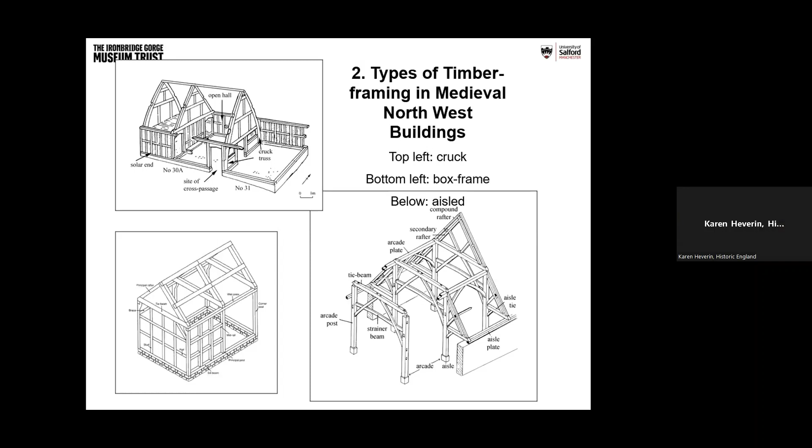The cruck frame building is one of the three main types of timber frame building that we have in northern England. Box frame building is the most common. The least common is the aisled building, and the cruck frame buildings are somewhere in between. In terms of numbers, there's probably 3 or 4 times the number of box frame buildings than there are known cruck frame buildings in northwest England, and that's pretty common for the area, as we'll see in a moment, where you find box frame and cruck frame buildings overlapping.

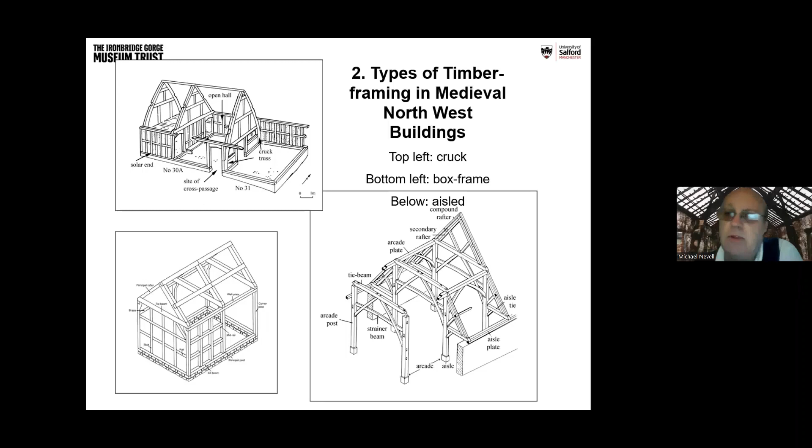One of the features of the cruck frame building is because you've got this capital A-shaped truss, it allows you to have a very big space on one floor, and so quite often you see these buildings associated with an open hall in the centre of a building. And more typically they're 3 units long. So they're very much in that later medieval tradition of open hall, communal living, and they fit that kind of development in the 12th to the 15th centuries.

These are the major elements you'll find in a cruck frame building, and so you can see the individual elements of the truss on the right hand side, where we have the 2 curved trusses, and then a collar and tie beam. Quite often you have a yoke at the top as well.

So you end up with those 3 forms of braces, and then you get spurs to the outer walls. And what that means is that the outer walls are really quite structurally separate to these A-frame trusses, and it's the A-frame trusses that support the roof. And whilst that gives you a large volume of space in each of these rooms, it does also make it actually quite difficult, quite inflexible to add extra stories.

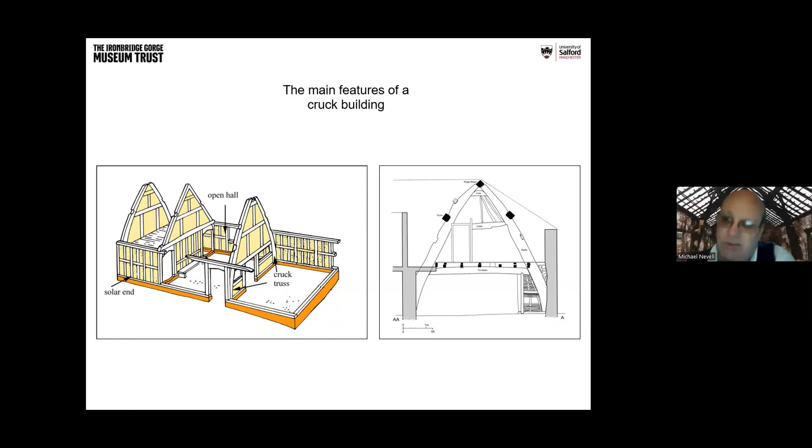We will see examples of buildings in a bit where the cruck frame truss structure has been adapted, and the way they've added extra stories is by moving over to a box frame tradition. So whilst this building form is great for the big spaces and communal living, it's not so good when we move into the 16th and 17th centuries, when there's that shift towards more personal living, more specialised room space, and the need for extra rooms and more stories. And that's really where cruck frame buildings start to fall out of fashion.

The Vernacular Architecture Group, I should give a shout out for them, because they've been pulling together the data on cruck frame buildings across Britain since the 1960s. Nat Alcock in particular has been leading that research for at least 40 years. They have a fantastic online database of cruck frame buildings, which they took the opportunity of the pandemic and lockdown to update and turn that into a live database.

And that database does 2 things. Firstly, it's got individual entries for all the cruck structures that we know of in Britain. Secondly, it also records the tree-ring dated, dendrodated structures across Britain as well.

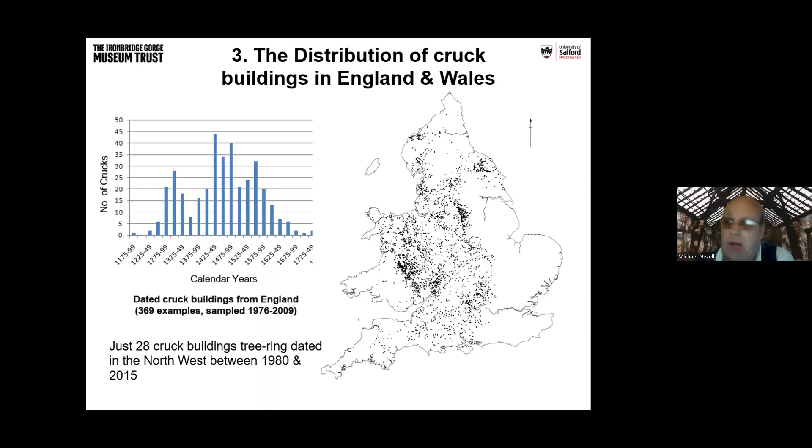Now, researching cruck frame buildings in the northwest of England goes way back to the 1970s. The first study of cruck frame buildings in a serious manner was undertaken by Marion McClintock in the Fylde Peninsula, which is the area behind Blackpool in that sort of northwestern corner of Lancashire. And here 35 cruck frame buildings were identified in the 70s and early 80s. Many of them were surveyed as well.

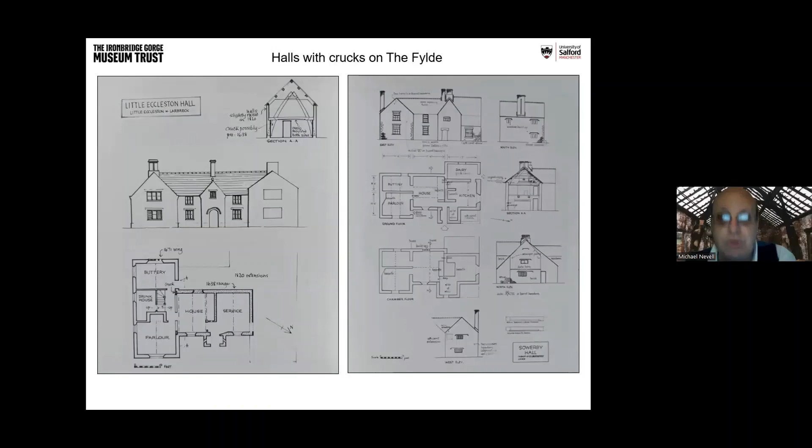And you can see these are thatched single-storey buildings, quite often just two units. So we're not talking about structures that are high up the social scale on this particular map, but they are our earliest view of buildings containing cruck frames. And you can see here from a couple of these drawings how the cruck frame structures then get incorporated into the vernacular architecture locally of the 17th and 18th centuries, and the cruck framed elements of these buildings really get buried, and that's one of the stories of how cruck frame structures survive in the region.

I think it was Mike Messenger, who was the conservation officer for Carlisle, did a postgraduate thesis on this survey work that he was involved with. Lots of the cruck frame buildings in northern Cumbria are rural and agricultural based.

Down at the southern part of the region, in northern Cheshire and Greater Manchester, we've been looking at cruck frame buildings since the 1990s. And one of the interesting things about Greater Manchester is that it's a largely urban area. I say largely, there are uplands to the north and the east that rise in some cases above 400 metres above sea level. There are some very significant river valleys like the River Irwell, the River Medlock and the River Mersey, which have lots of late medieval settlement along them. But we have a fair amount of urban sprawl because of industrialisation.

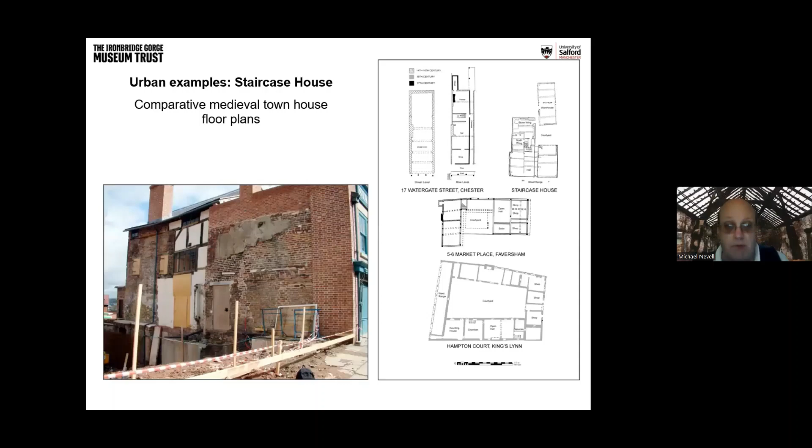So just to show you two examples of urban cruck-framed structures. Urban cruck-framed structures quite clearly were, in some contexts, more common than they are today, but they tend to be quite rare. So this is Staircase House, for instance, where the cruck-frame truss was revealed by a really quite bad fire in 1995, 1996, as being the core of a merchant's house, and then later on a gentry house. And this has a history spanning from the 1460s, which is the date of the cruck-frame building, through to the 20th century. And in the 16th and 17th century, this is a courtyard property with timber box frame buildings around it, but also some stone wings as well.

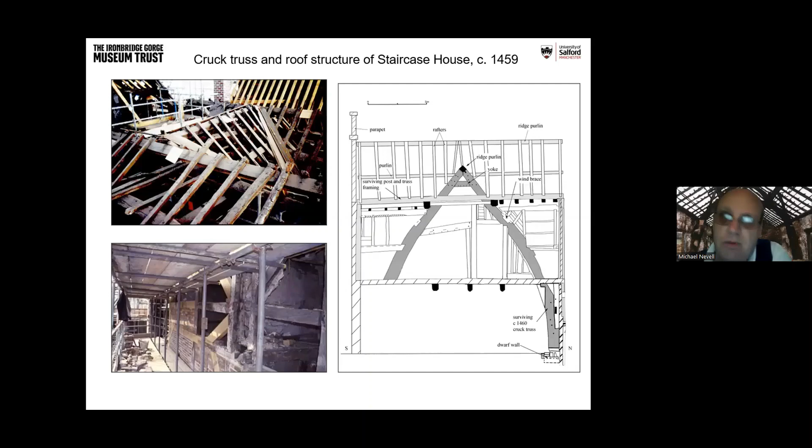And this is an example of a building that's expanded using box frame, the box frame tradition, in order to create extra floors. Actually, in this case, 2 floors, and then at the back there's a 3-floor extension.

Altrincham is another of these late medieval market towns we have in northwest England, where we have examples of cruck-framed buildings. And one of the things we've got here is records of demolished cruck-frame buildings around the old medieval marketplace. That's what the black and white building at the bottom is doing.

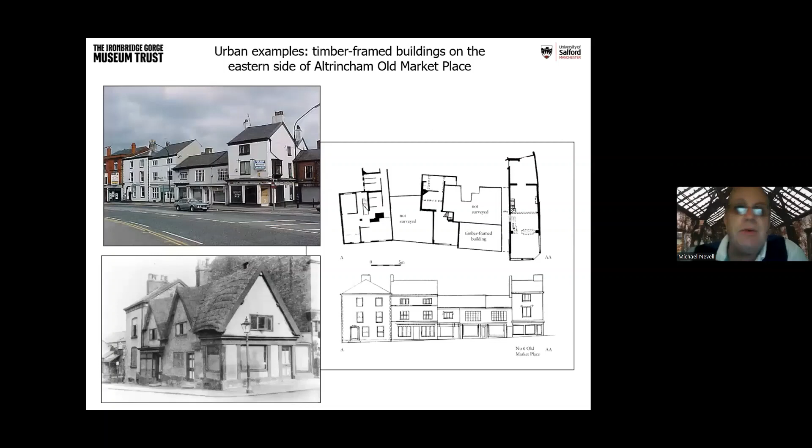But we also suspect there are some cruck-frame buildings in the range of buildings at the top and on the right-hand side there. And we had an opportunity to look at one of these in late 2019 during renovation work of the range of buildings in the top left-hand corner there, particularly the 2-storey buildings in the middle, which are sort of suspiciously low in scale.

And lo and behold, inside those structures, we had fragments of internal timber frame partitions with wattle and daub, sitting on sandstone sills. And in one wall, we've got this one surviving cruck truss, which you see here exposed for the first time, presumably in about 200 years, in the partition wall between number 10 and number 8 Old Marketplace in Altrincham.

So again, it's quite common to find these structures in this kind of location. But for Altrincham, this range of buildings, we knew they were timber framed. We didn't suspect they were cruck framed at all.

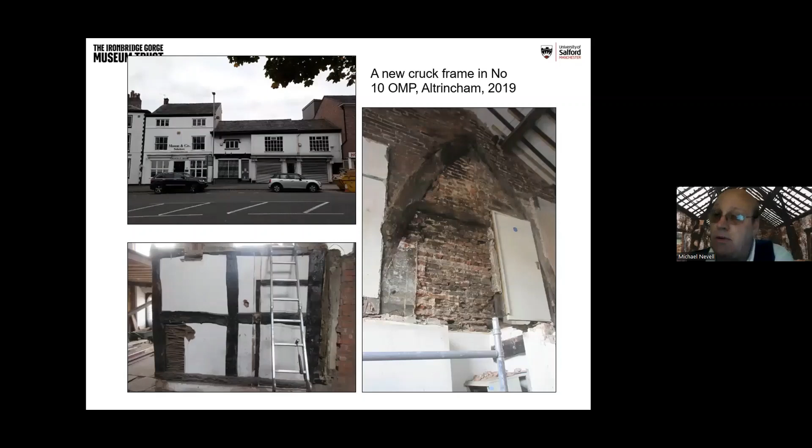And what's interesting about this particular building from an urban point of view is that it runs across 2 burgage plots and is parallel to the marketplace, rather than running back with the gable end fronting the marketplace, which is what most of the other buildings around the old marketplace do. So it's in quite a prominent position, occupying the front of those 2 burgage plots.

Most of the cruck frame buildings we've studied in northern Cheshire and Greater Manchester, though, are in a rural location. So, for instance, this is Apethorn Fold. You will recognise that as the background to my picture. And this is actually dendrodated to the late 15th century.

It's a 4-bay cruck-frame building, sadly hit by fire in the 1990s, but you're looking at one of the cruck trusses at the end of an open hall leading into the domestic rooms at the eastern end of the building, and you can see at the bottom the plan of the crucks and the later stone and brick additions.

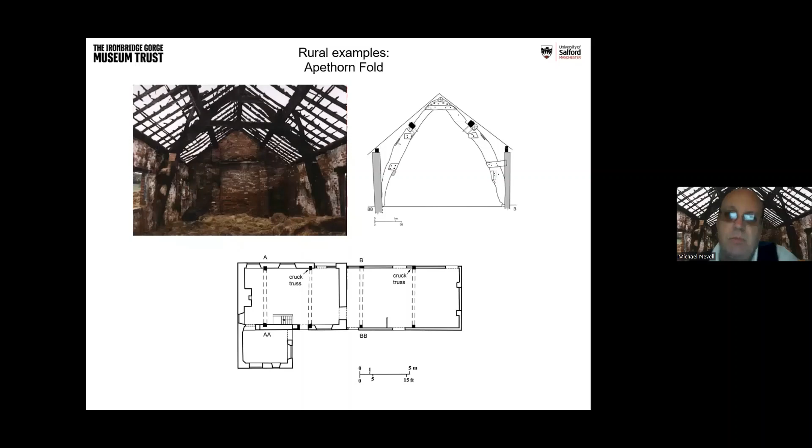And there's actually very little documentary material associated with this farmhouse. Again, that's quite normal for many of the rural buildings that have cruck structures in the region. We know that this is a freehold property that then becomes a tenanted property by the early 18th century, but we don't know precisely the status of the people who built this cruck-frame structure in the 15th century.

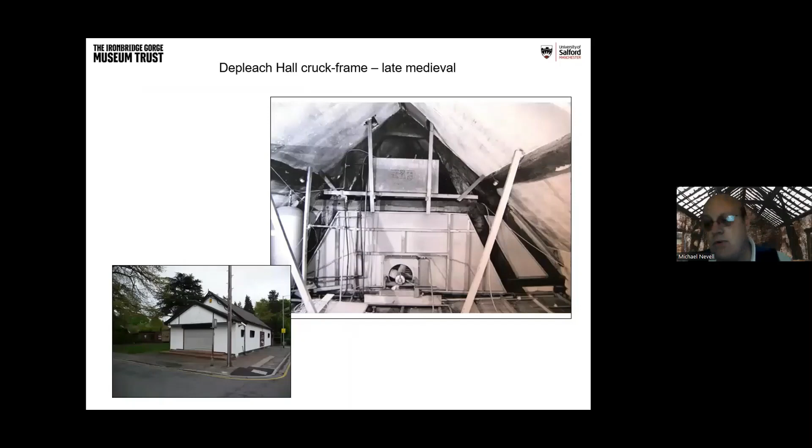And again, we've got fragments of timber framing in various parts of Greater Manchester, which have elements of crucks in them. So here we have the remains of a cruck-frame building used in a garage in Stockport, whereas this example in Kersal in Salford is almost a complete survival.

It's probably the best surviving cruck-frame building in Greater Manchester, which was built as a monastic cell for Lenton Priory, dendrodated to 1515. It's got these two cross wings which were added in the 1550s after the Reformation. You can see here from the plan form that we've got 4 cruck trusses in the centre of this building, and then after the Reformation we've got the introduction of a first floor and 2 box frame wings to make it more domestic.

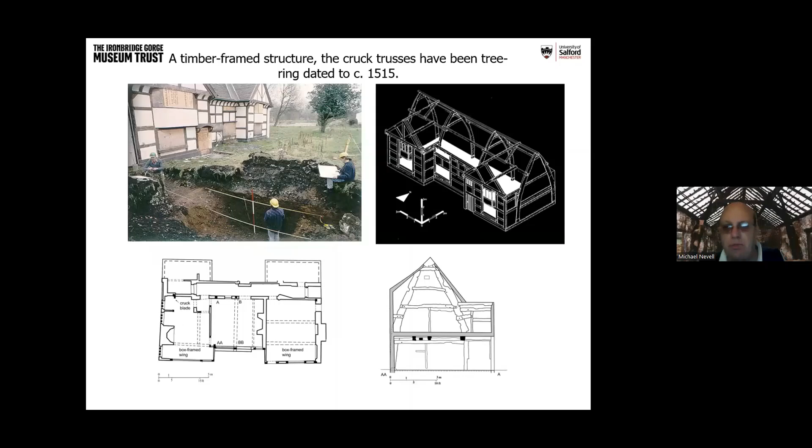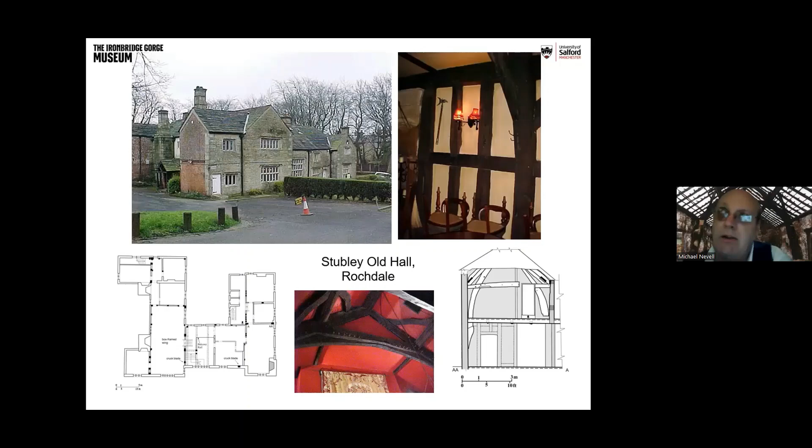Elsewhere in the region, having said that we don't really have very many cruck frame structures in the upland areas, you can see here one in Rochdale in the upper Irwell Valley, which has a stone exterior, but is actually a cruck-framed open hall with a cruck-framed wing, large elements of which survive within that current structure. Again, dendrodating suggests that's late 15th, early 16th centuries.

I'll come back to the carpentry techniques at the end of my talk, but there's some distinctive features around the finishing of the cruck trusses, around the apex and the yoke, which are particular styles in cruck truss design that you can see on a regional level, not just in northwest England, but in other parts of England and Wales, showing there's some commonality in the carpentry techniques being used.

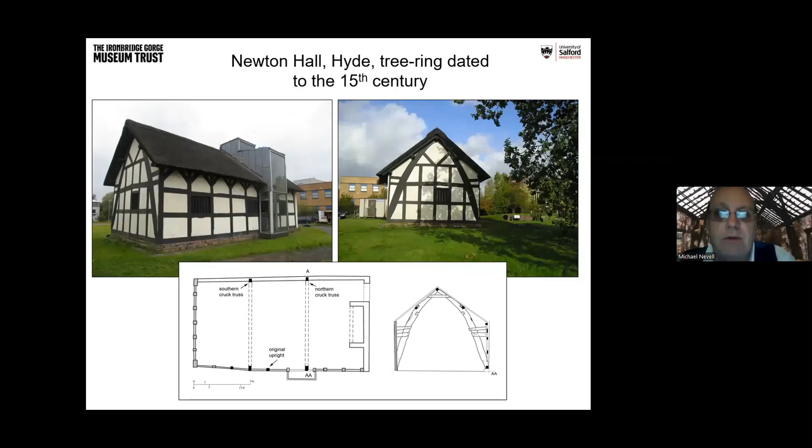I mentioned at the beginning that I've been looking at a number of rural examples, and I wanted to talk a bit about Warburton and the cruck frame buildings from there. So for this next bit of the talk, I'm just going to look at the cruck frame buildings in the rural township of Warburton, which was in northern Cheshire but is now in Greater Manchester. It's a surviving piece of rural landscape. It's 2 kilometres in extent, and it divides very nicely into 4 quadrants.

So you can see on the top left-hand corner we have a deer park. Bottom left-hand corner we have the medieval village and open fields, and then top right-hand corner an area of mossland, and bottom right-hand corner we have an area of ridgeland above the River Bollin, which forms the southern part of this township, which is hedged enclosures from the late medieval period.

And the dots there represent the known cruck structures as identified by 2010, and the black dot represents the only known cruck building in 1990. And the massive increase in the number here is because of a long-running archaeological survey that I was involved in running with the local Archaeology Society and with the University of Manchester and the University of Salford. And we were able to get into over 50 buildings in Warburton, thanks to the good offices of the people living in the rural township.

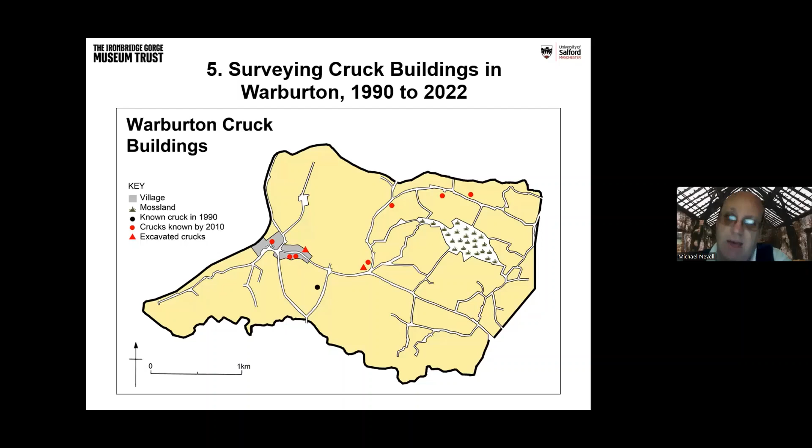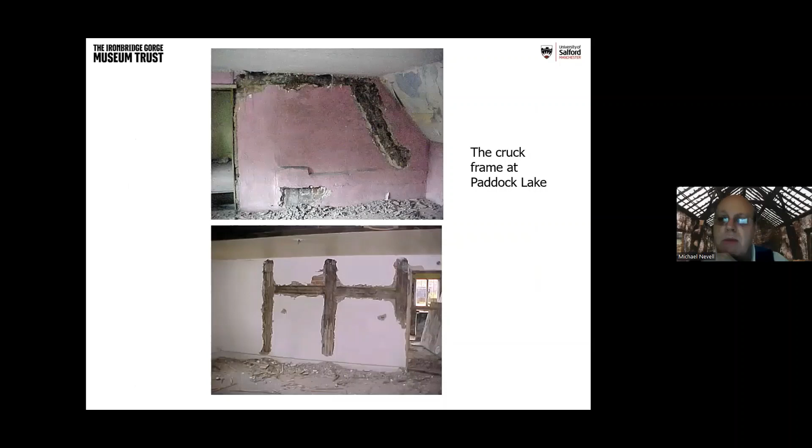Other buildings which we got into whilst they were being renovated included Wigsey Farm, where there was a single cruck-frame truss just to the right of the doorway. You can see in the bottom right-hand corner there. This is a building that was expanded in the 18th and again in the 19th century, and had fireplaces inserted through the middle of the cruck truss. You can see on the left, taking out much of the tie beams and removing the yoke, but leaving these fragmentary remains.

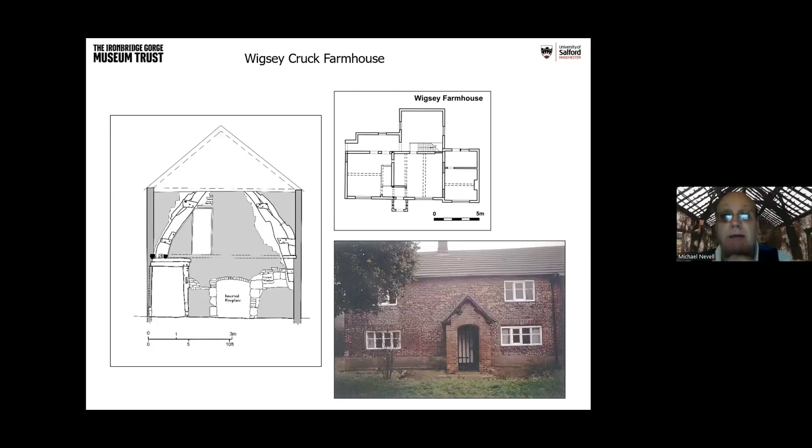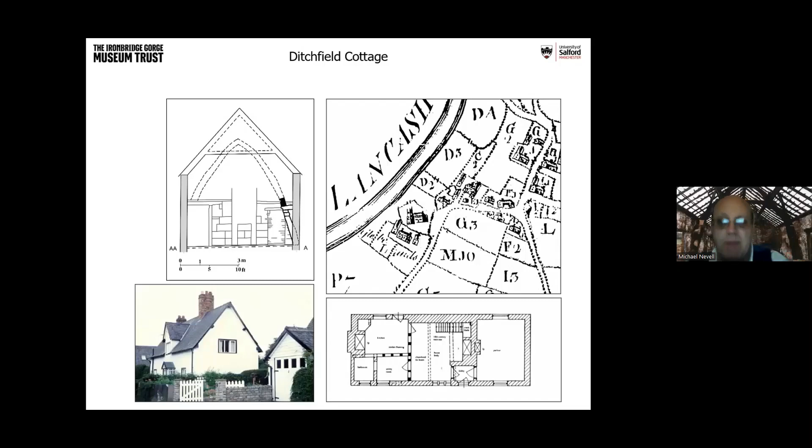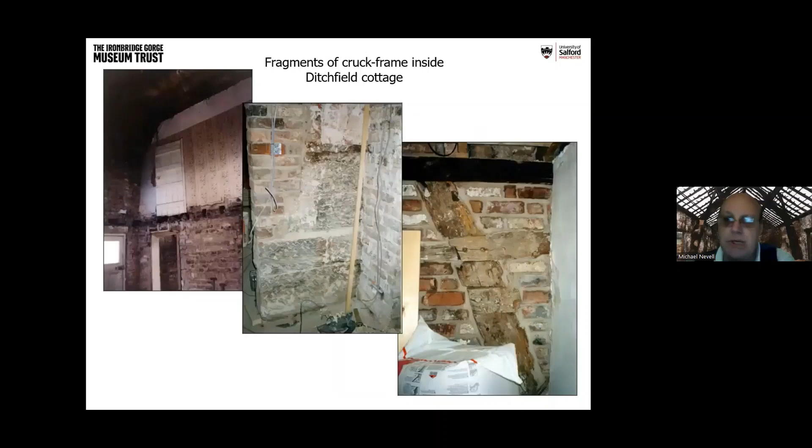And other buildings with fragmentary remains include Ditchfield Cottage here, which is also shown on this 1756 estate map in the top right hand corner, and inside you can see how fragmentary it is. We've got the stone backing for an ingle fireplace which is inserted in between the cruck truss fragments, which you can see on the right, and then occasionally you find several cruck trusses in a barn.

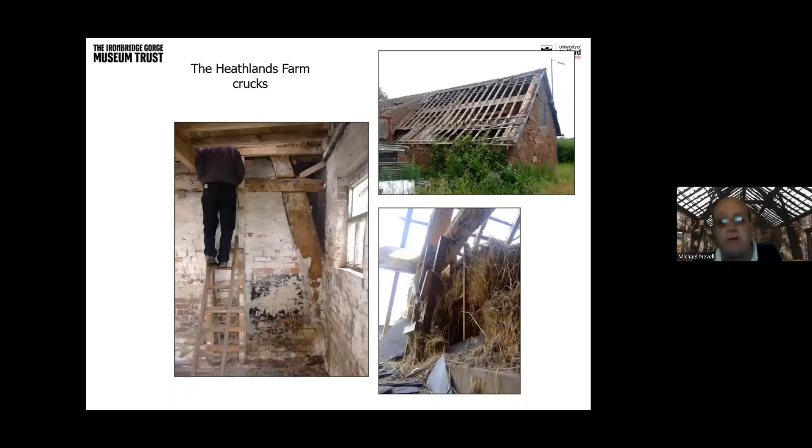This is on the northern side of Warburton, which we rediscovered in 2008. You can see the chairman of the local Archaeology Society up a ladder there, busy recording the structure, still in use as a barn when we were looking at it. You can see it's been converted in the 19th century, rebuilt and extended as a brick shippen.

So just to sort of wrap up on cruck frame structures in the northwest and bringing some of this data together, I talked about the carpentry techniques visible in some of these cruck frame structures where they survive with complete trusses. And one of the distinctive features of trusses is you can look at the form of the top of the truss, the apex, and the Vernacular Architecture Group has characterized 7 main types of apex design in cruck trusses.

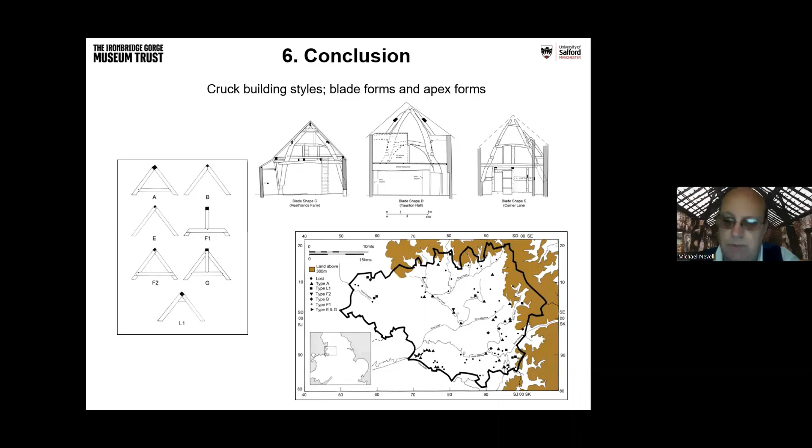Very few of these buildings have elaborate cruck-frame trusses defining the open halls. Most of the cruck buildings we've got in Cheshire and Greater Manchester are domestic rather than agricultural. It's about a 60-40 split, but very few of them have elaborate carvings on the cruck trusses that frame the hall. Although some of them have curved timbers and spandrels which do emphasize the status of the hall, as in the cruck truss at the top of this slide at Taunton Hall. That was dendrodated to the 15th century.

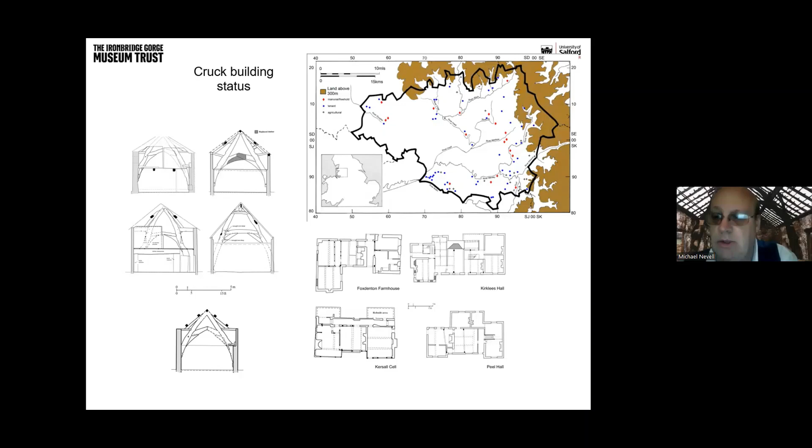The majority of cruck-frame buildings we've recorded in Greater Manchester are farmhouses, principally, then manorial halls, and then agricultural structures. And that's a pattern we see repeated across the Fylde, across northern Cumbria, and elsewhere in Lancashire and Cheshire as well. So if you have a cruck-frame building, you've got a 2 in 3 chance of looking at a building that predates 1600. You've also got more than a 50% chance that you'll be looking at a tenanted farmhouse. That makes them an indicator of earlier settlement in the region.

Now, there are other indicators as well, because the cruck-frame building tradition runs alongside the box-frame tradition. They're broadly the same chronology in the region. So wherever you get these timber frame buildings, you are looking at indicators of early settlement. Although we know from the mid-17th century to the mid-18th century there's a real boom in the agricultural population in the region, and lots of new farmhouses being built. In Greater Manchester, probably the number of farmhouses doubled in that 100 years. So these are really important indicators of that late medieval landscape surviving into the 17th and 18th centuries.